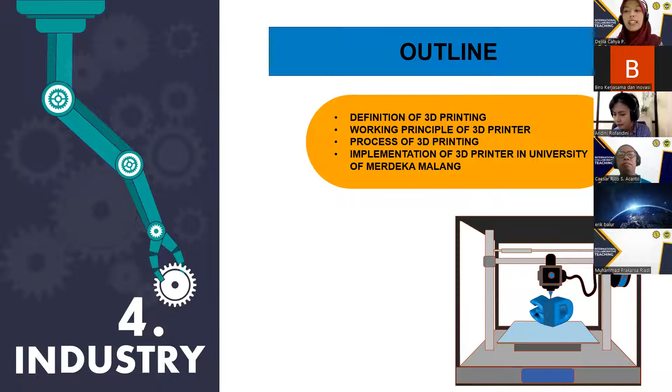Now, in this time, I will share with you all my knowledge on the development and implementation of 3D printing technology. In this session, I will explain the definition of 3D printing, the working principle of a 3D printer, the process of 3D printing, and lastly, the implementation of 3D printers at University of Merdeka Malang.

What is 3D printing? 3D printing is also known as additive manufacturing, a method of creating a three-dimensional object layer by layer using a computer-created design. 3D printing is an additive process whereby layers of material are built up to recreate a 3D part. And what is additive manufacturing? Additive manufacturing, or AM, is the industrial production name for 3D printing—a computer-controlled process that creates three-dimensional objects by depositing material, usually in layers.

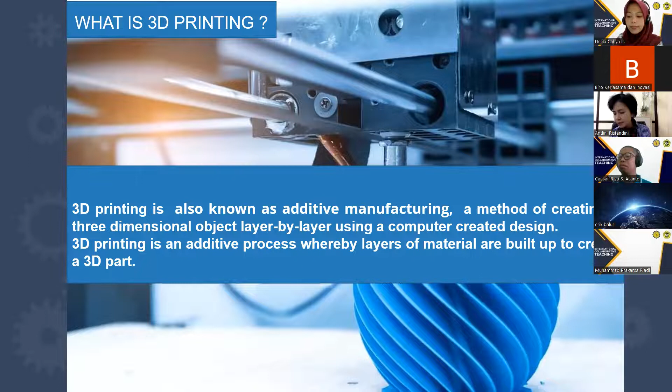Next is the working principle of a 3D printer. There are 3 steps. First is modeling: it takes virtual blueprints from modeling software and slices them into digital cross-sections for the machine to use as a guideline for printing. Second is printing: the machine reads the design from computer-aided design and lays down successive layers of plastic filament to build the model. After the printing process finishes, the object is polished to get the final product and support structures are removed if there are any. You can see the picture—this is the modeling with computer-aided design, second is the printing process, and last is finishing the object.

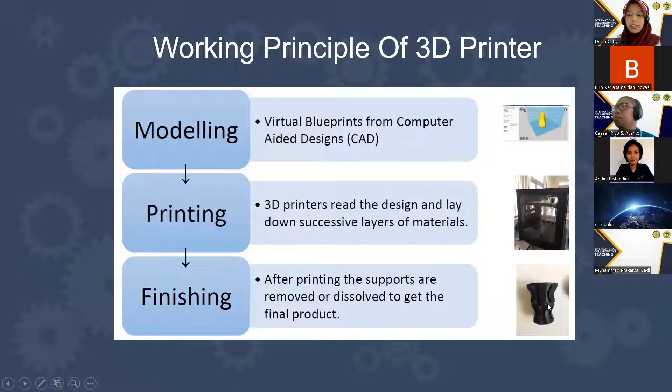How does it work? As I mentioned before, the first step of any 3D printing process is 3D modeling. To maximize precision, all objects have to be designed in 3D modeling software—that's where computer-aided design, or CAD software, comes in. Modeling allows the printer to customize their product down to the tiniest detail, thanks to the 3D modeling software's ability to allow for precision design. Then, after designing in computer-aided design, save the 3D design from CAD software as an .stl file. STL is stereolithography, a form of 3D file most commonly used in 3D printing.

After saving the format as an STL file, it's time to slice the model. Engineers need to slice the model into layers in order for the printer to create the final product. Slicing software takes scans of each layer of a model and tells the printer how to move in order to recreate that layer. When the modeling and slicing of a 3D object is complete, it's time for the 3D printer to finally take over. Then the object is finished. This is an example of a 3D object.

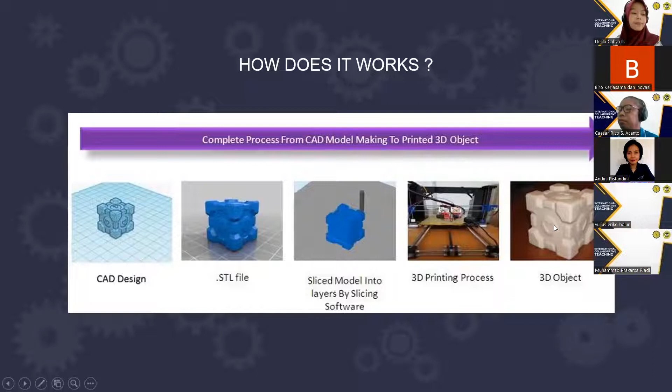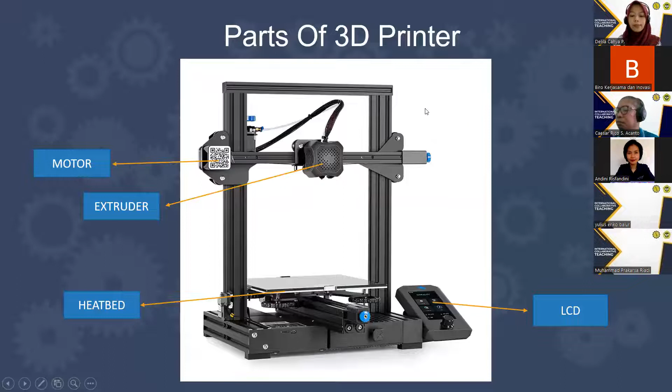Next, the motion of 3D printer. There are three axes making up the 3 dimensions: the x-axis, y-axis, and z-axis. The x-axis refers to left and right movement. Y-axis refers to forward and backwards movement. And z-axis refers to up and down movement. A printer such the Ender is known as a XZ hot end and Y bed printer. This means the hot end assembly moves along the X and Z axis, left, right, up, and down, while the bed moves forward and backwards on the Y axis.

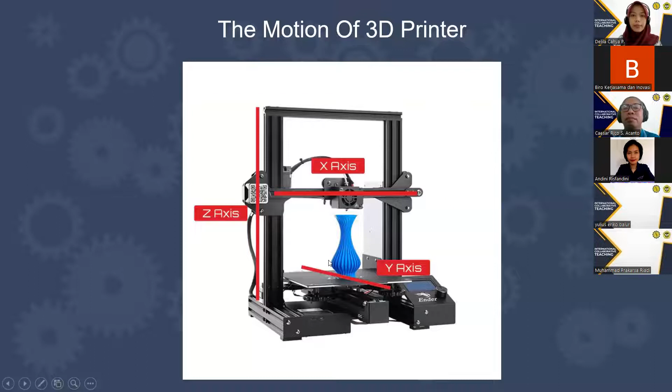3D printer filament. 3D printer needs materials to print the 3D object. In this case, this printer uses plastic filament to print the 3D object. What is filament? Filament is a thermoplastic feedstock used for 3D printers. You can see the pictures. This is the roll of filament, plastic filament. And what kind of plastic filament?

First is PLA, an acronym for polylactic acid. PLA is suitable for complex prints and is particularly common in prototyping and architectural mock-ups. It's also usually the standard printer filament for users new to 3D printing.

Second, ABS filament. ABS is an acronym for acrylonitrile butadiene styrene. ABS is one of the first plastics to be used for 3D printing.

Third, HDPE, an acronym for high-density polyethylene. HDPE is gaining popularity as a 3D printing material because it's easy to transform into new material through recycling. There are many colors for filament plastic, and this is the 3D object.

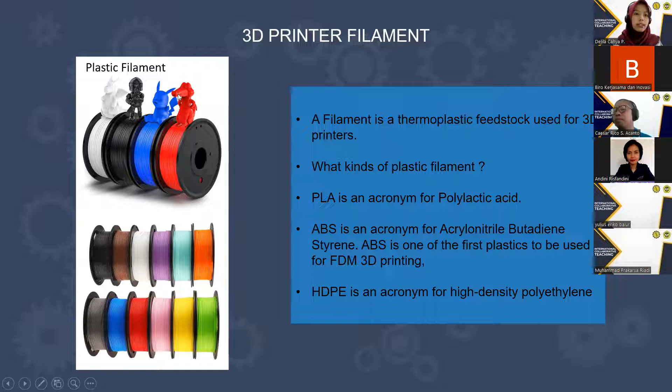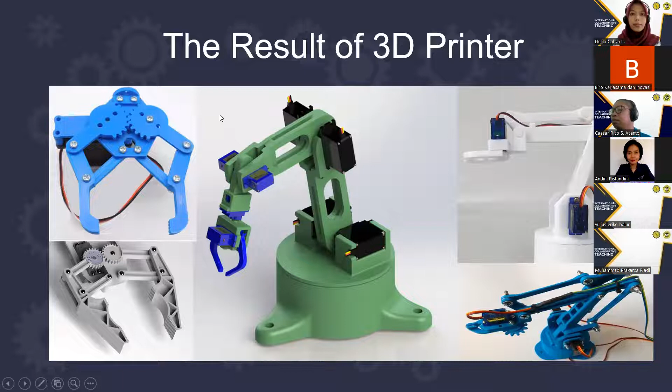Next, implementation of 3D printing in Department of Electrical Engineering, University of Merdeka Malang. We use 3D printer with model Creality Ender 3 V2 and other specifications such as maximum print size, maximum object to print 220 times 220 times 250 millimeters. The number of nozzles is just one, with diameter nozzle 0.4 millimeter, and the type of filament used is ABS. ABS has temperature hotbed 100 degrees Celsius and temperature nozzle 240 degrees Celsius. Display using LCD.

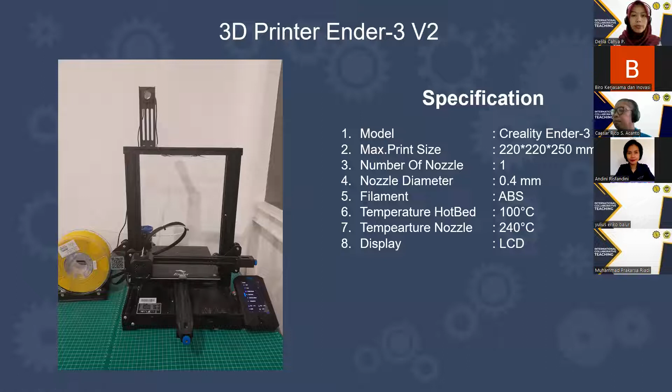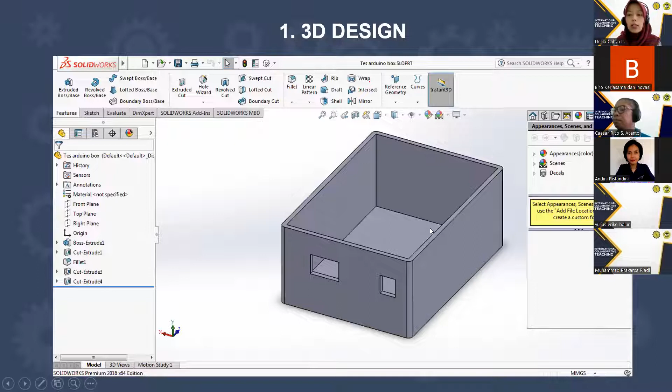Next, I will explain the steps for the printing process. We use SolidWorks software to design 3D. For example, we design an Arduino box. Arduino is a microcontroller. After we finish the design of the Arduino box, we save the file to STL format.

We save, then we open slicing software. In Electrical Engineering University of Merdeka Malang, we use Ultimaker Cura. This is the model of the Arduino box. We can see the size of the object, x-axis, y-axis, z-axis.

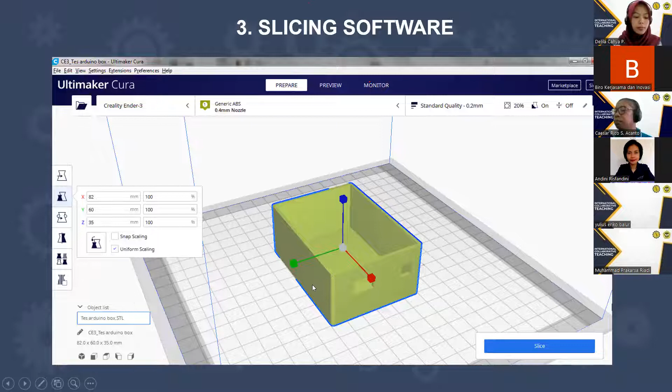After that, we choose standard quality. Next, we set the temperature for printing because we use ABS filament. Printing temperature is 240 degrees Celsius. Then build plate or bed temperature is 100 degrees Celsius for ABS filament.

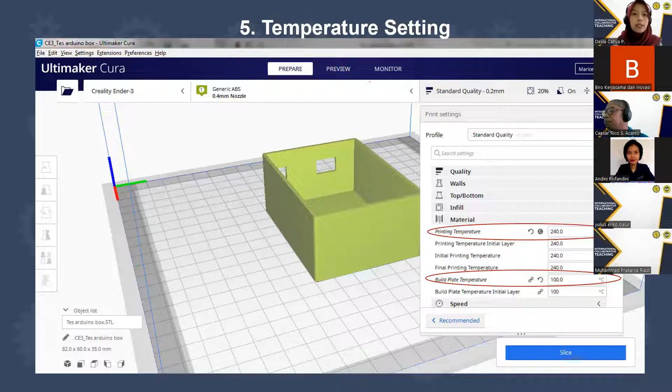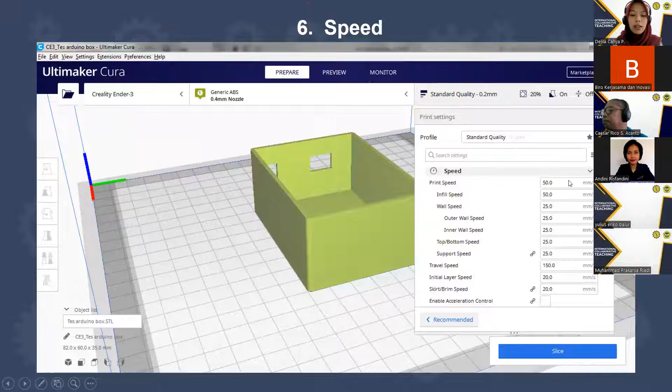Then we choose material ABS and the nozzle we use in 3D printer Creality. Nozzle size is 0.4 millimeter. Speed we use for print is 50 millimeters per second. Then we click slice.

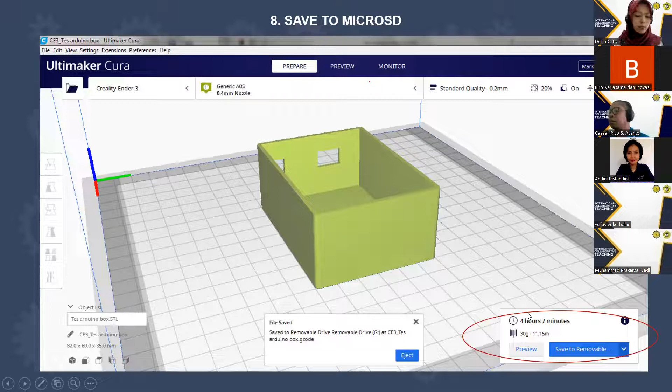Next is slicing processing. Then we know the process to print this Arduino box needs 4 hours and 7 minutes. Then we have to save to micro SD and the format becomes G-code. After that, we insert the micro SD to the port in the 3D printer, and in the display LCD of the 3D printer, we choose print. Then we choose the file Arduino box G-code.

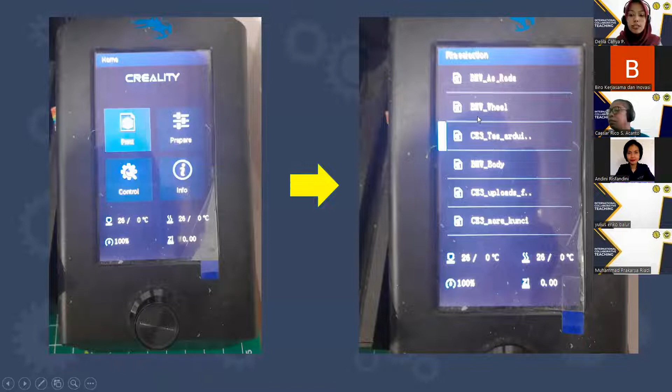Next, processing of printing. In the right picture, in this process, filament of solid thermoplastic material is pushed through to heated nozzle and prints layer by layer based on the 3D model.

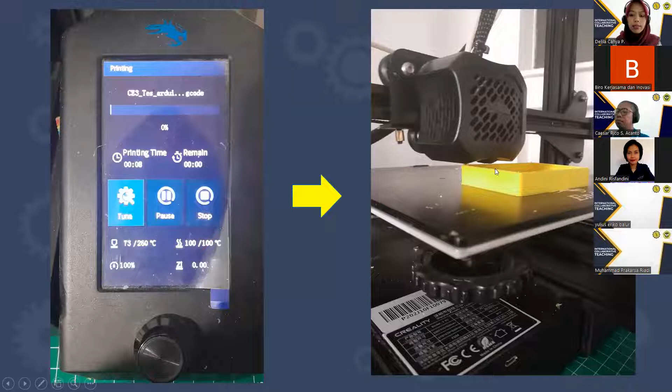And the result of the 3D model Arduino box. Here you can see this is the Arduino microcontroller. We print the Arduino box with filament type ABS.

We can print other objects like car toys, then cat toys, frame robotics, battery box, keychains, and many more. This is the result of objects from the 3D printer in Electrical Engineering, University of Merdeka, Malang.

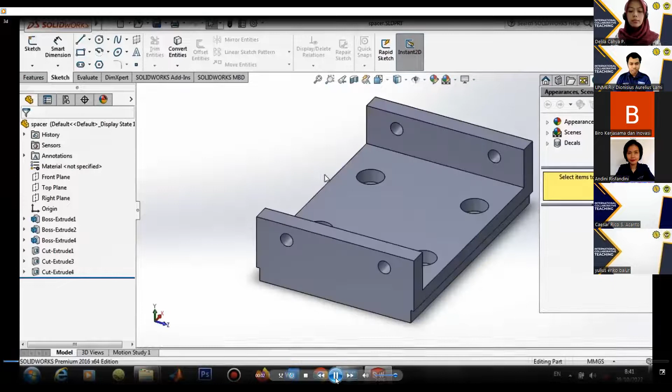This part is actually very small, but it looks detailed like this. After we make this model, we save the files as an STL file. Then we can just open the STL file using a program called Ultimaker Cura.

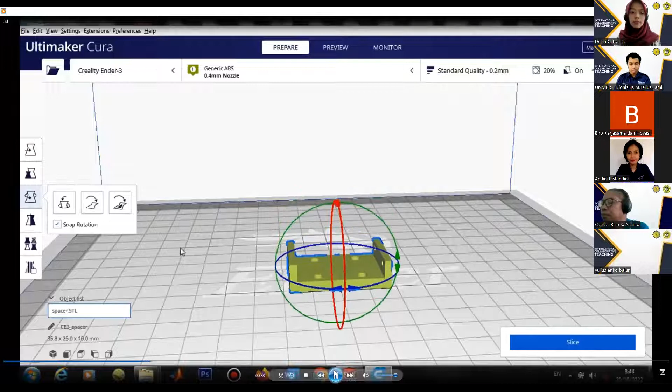So this is the Ultimaker Cura software, and this is our 3D model. However, the orientation is incorrect, so we need to rotate it to the correct position, like this. And then we can just check the size. It is already correct, so we can jump to material.

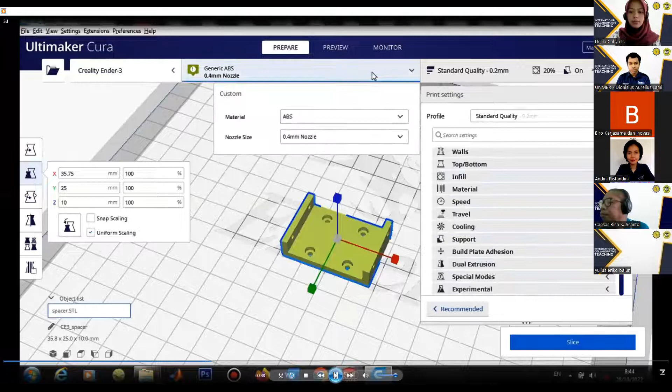The material is correct, the infill is correct at 20%, and the support is correct too, so we can just leave everything as normal. Then we can start slicing the 3D model into G-code. After the process is finished, you can see the time duration of how long the printing process will take, so we can just save the G-code files to our disk.

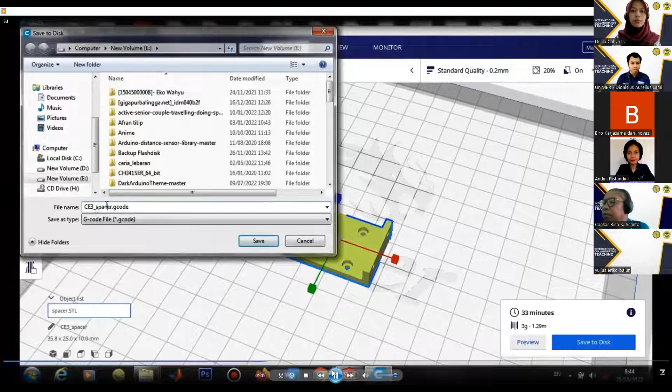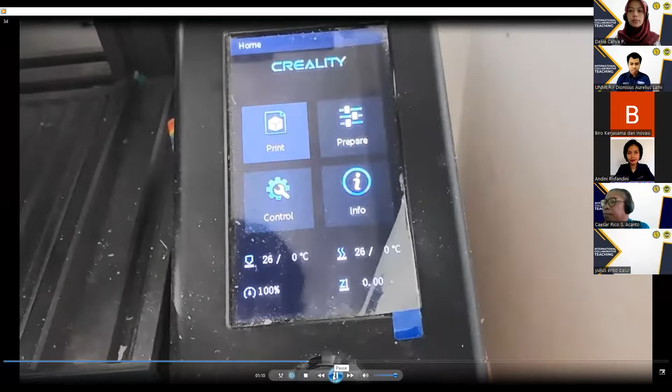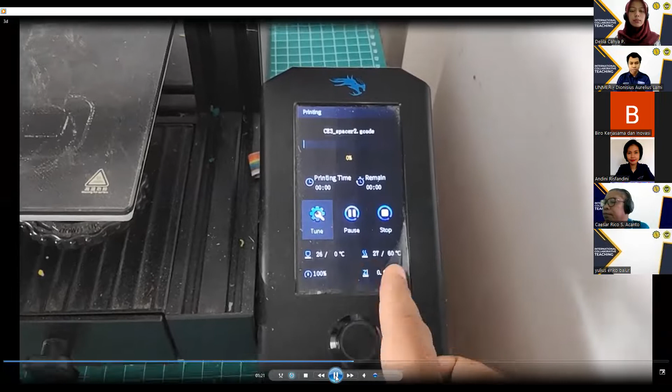After that, we can just go to our 3D printer. So this is our 3D printer. Let's select our file, this one. And then we can just wait for the 3D printer to start. However, we need to wait until the temperature reaches the desired level, and then the printer will start.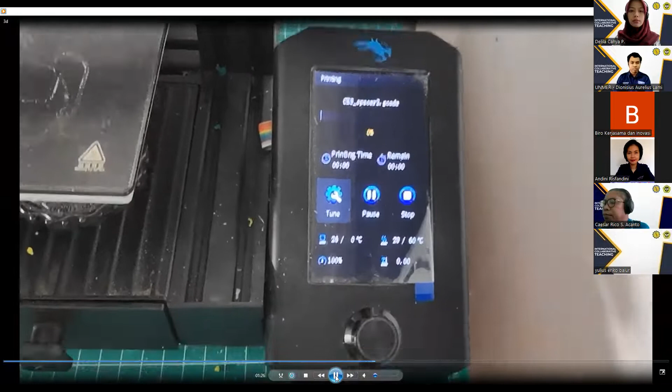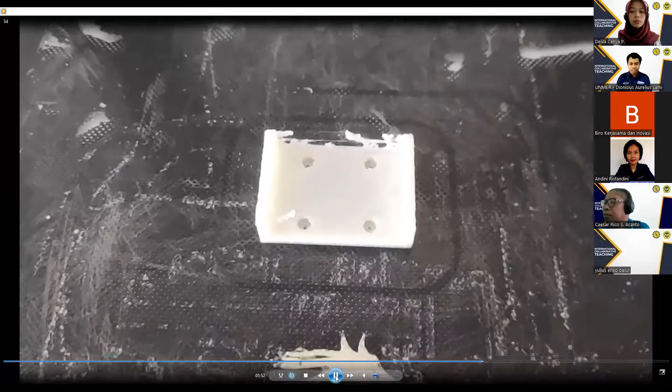So this is the process of the 3D printer in real time. However, the process will take a lot of time, so I will speed it up. Okay, so this is the sped up version. Like the specification says, it will take about 30 minutes. And this is the result of the 3D printed model.

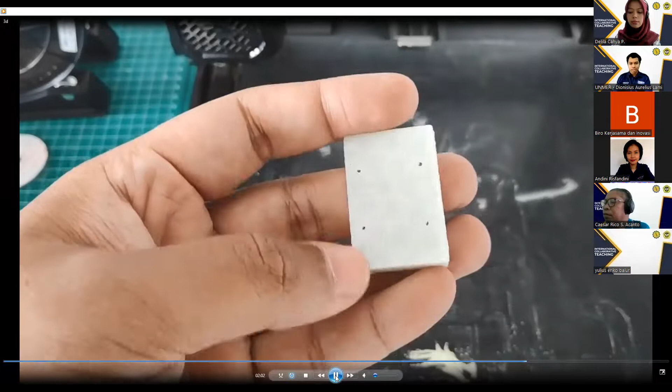Sometimes it's very hard to pull it out, so I recommend using alcohol. And this is the final result after finishing. It looks smooth, it looks good, and it is applicable to our robot.

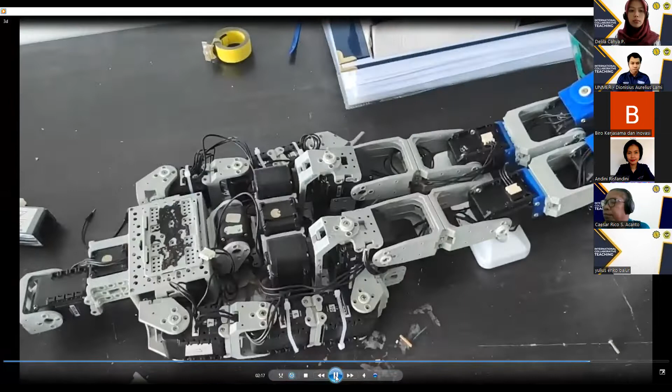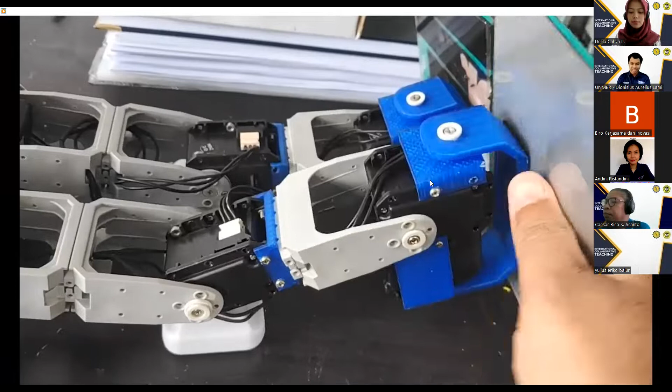And this is another model that I made too. And this is our robot. As you can see, the application for our robot is on its legs, and we place it like this so it can move beautifully and smoothly. Trust me, it is very strong, so it won't break easily.

Okay, so I think that's all about the demonstration of using a 3D printer in the robotics department. Thank you very much for your attention, and I will give it back to the moderator.

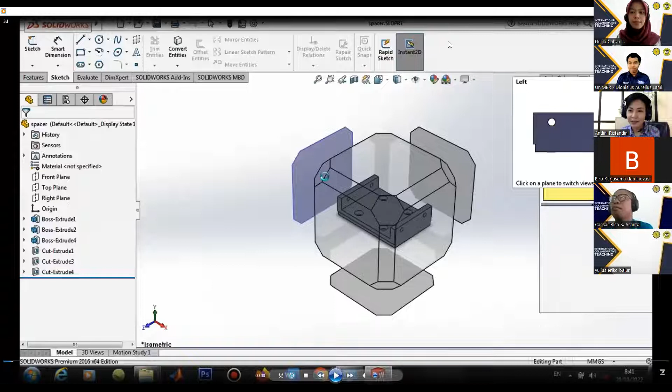All right, thank you so much Dionisius and Ms. Delila. Very interesting presentation about 3D printing. Can you tell me what are the things that you created using that printer so far?

Is it robot only? Currently it is robot only, and sometimes we made a third-party project like a phone holder, and like Delila said, a box for Arduino. A box of Arduino? Arduino is a microcontroller in electrical engineering. Oh, it's a microcontroller. Okay, very interesting, and it should be very useful, right? Yes, it is very useful.

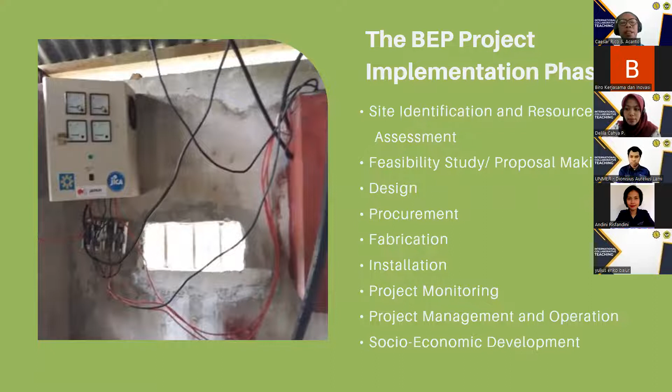Let me discuss the different steps in our BEP program. First is site identification and resource assessment. Site surveys are done initially based on identification of the RE resource in the area. A one-time measurement and assessment of the elevation, flow, and other relevant site characteristics for microhydro systems are gathered during this phase. Interviews with residents are also conducted to determine the history and characteristics of the site regarding regularity of water supply, water use, flooding, and soil erosion, among others.

Once a particular site is identified as a potential site, a detailed survey follows for final site selection of the different components of microhydro, such as weir, channel, forebay, penstock route, powerhouse, transmission, and distribution lines. The suitable site for the solar charging station requires an area without trees or other structures that can shade the solar panels, and its location must be accessible to the recipients, normally situated at the center of the community. This stage involves direct personnel of the center as well as the study leaders, whose expert assessment and suggestions will be the basis for the final site selection.

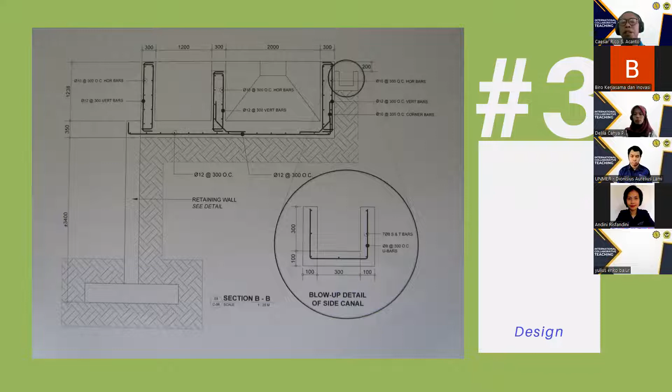In most cases, they are involved in the preparation of the design. The number of panels to be used in a solar charging station is dependent on the number of beneficiaries in the area. The fourth step is to do the canvass and procurement.

Canvassing is usually done for purchases less than 500,000 pesos, roughly 8,600 US dollars. If you have this cost, you need to do canvassing, but below this, you can purchase it directly. This is the fastest and most convenient process, where suppliers compete for a lower price and deliver the items at a specified date.

Bidding is seldom experienced; it is usually made for purchases requiring more than 500,000. This entails a longer time frame, from the publication of the notice for bidding up to the delivery of material.

The next step is fabrication. Critical components of the system such as frames, penstocks, and turbines are fabricated locally at CPU-AREC using skilled workers in our center, without sophisticated equipment. We call this type of manufacturing process backyard fabrication. Commonly used tools and equipment include oxyacetylene torch, lathe machine, welding, drilling, and grinding machine.

No high-tech equipment is used, so when we go into the community, even the community people can learn how to do the repair, because the parts are made using local and common tools.

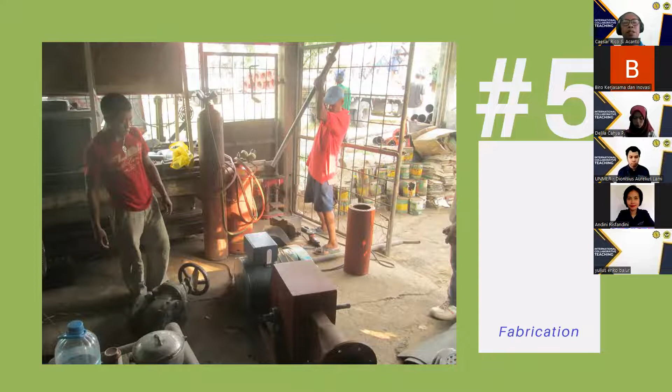The next step is installation. Since most project sites are located in remote mountainous areas of the region, installation becomes a real challenge. Materials and components are designed to be modular to facilitate transport and installation. For example, wind turbines and frames are designed to be detachable and are assembled on site.

Safety of workers during project implementation is always a priority, especially on high and medium head systems. Ropes, cables, ladders, and sometimes animals are used to transport materials and even personnel. Teamwork between CPU-AREC representatives and local residents plays a vital role in providing willing and able manpower.

As you can see in the picture, the workers here are the community people. We don't hire outside experts or outside workers in a project on the community, so there will be no conflict between the workers and the community. This is what we call the Bayanihan spirit, where all join hands to make a challenging task possible.

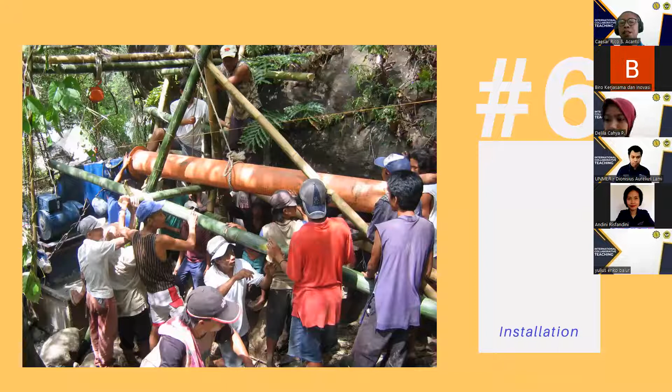Next is project monitoring. Feedback and reports are used for project monitoring, usually made by partner organizations like the Barangay Power Association (BAPA), the local government unit (LGU), or even non-governmental organizations (NGOs).

Scheduled project monitoring is arranged by CPU-AREC to check the project's operation and financial status. Project impact assessment is also conducted by partner organizations to evaluate the overall significance and effect of the project to the community. Next is project management and operation.

The establishment of a Barangay Power Association in the community is necessary to operate and manage the project. BAPA officials are trained in simple financial management, such as tariff collection and bookkeeping, operation and maintenance, household wiring, and troubleshooting, with the help of the electrical engineering department, TESDA, and the local government unit.

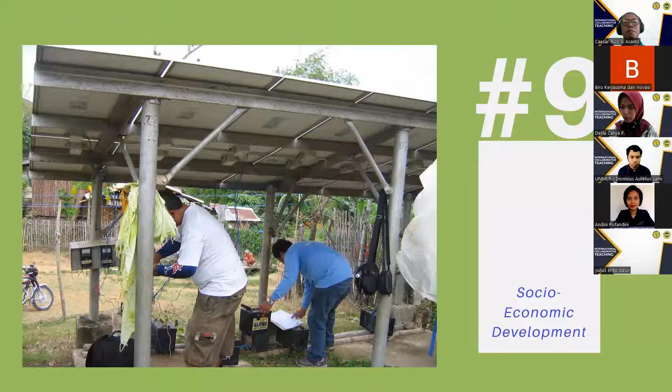Communal refrigerators are sometimes used for food storage and vaccines that help improve the health services in the community. Communal lighting facilities are also introduced to help improve the peace and order situation of the area. School lighting, sound system, and communal TV facilities help improve the entertainment and educational standard of the students in the remote places.

Okay, so with all of these things that were done during the electrification program, how does this impact, or what is the result of it in the community, in the school, and even in the government? So let us look at the outcome of the project by the numbers.

First, let us look at the location or the number of projects that were implemented. So the BEP program has resulted in 79 projects implemented by CPU-AREC all throughout Panay. So as you can see here, these are the numbers by provinces.

So we have Aklan, Antique, Capiz, Iloilo, and Guimaras. The summary of project implemented per province is shown in this table. It can be noted that the concentration of BEP project is in Antique and in Iloilo. So most of the projects are in these two provinces. In Antique, these projects are in the mountainous area, while in Iloilo, it is mostly in the northern part.

So the budget of each project is dependent on the type of system to be installed, the capacity, the geographical location, and the type of structure to be built. Solar charging station with 4 charging nodes and 16 panels would cost around 500,000. And microhydro system cost in the range of between 500,000 to 3 million pesos.

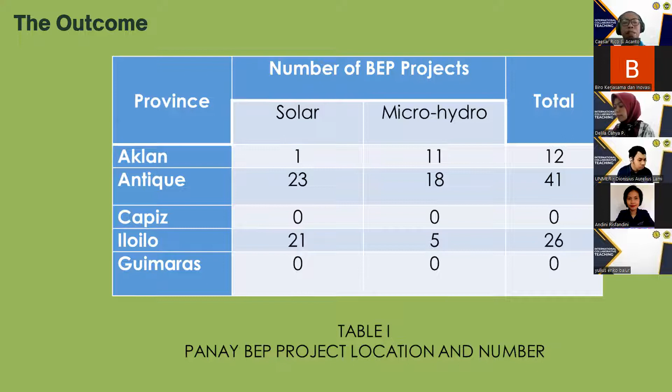Next is the impact to the student or the outcome for the student. So the students and faculty members were able to conduct 12 activities related to BEP. This includes training, household wiring, repair and maintenance, installation of powerhouse components, and protection system. So these are the projects that were implemented by both students and faculty of the university.

So since in our university, we are also required to do community engagement, this program has really helped us in fulfilling that requirement.